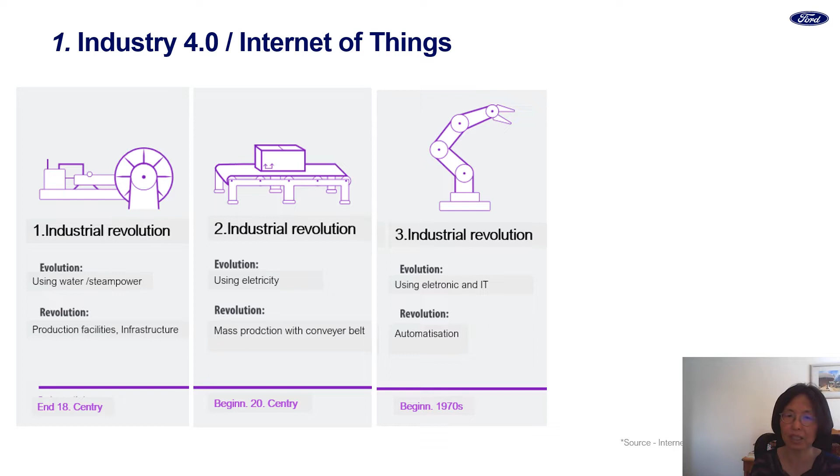Most of you are already aware what Industry 4.0 is, but to get the same basis, I would like to go through it quickly. The first industrial revolution is production facility and infrastructure revolution using water and steam power. The second industrial revolution is mass production with conveyor belt using electricity; Henry Ford was the main contributor of this revolution. The third industrial revolution is automatization using electronic and IT systems. The fourth industrial revolution is the cyber physical system using complete digitalization and net connection. Here, cyber means internet and physical system is things, so we're talking also about the Internet of Things.

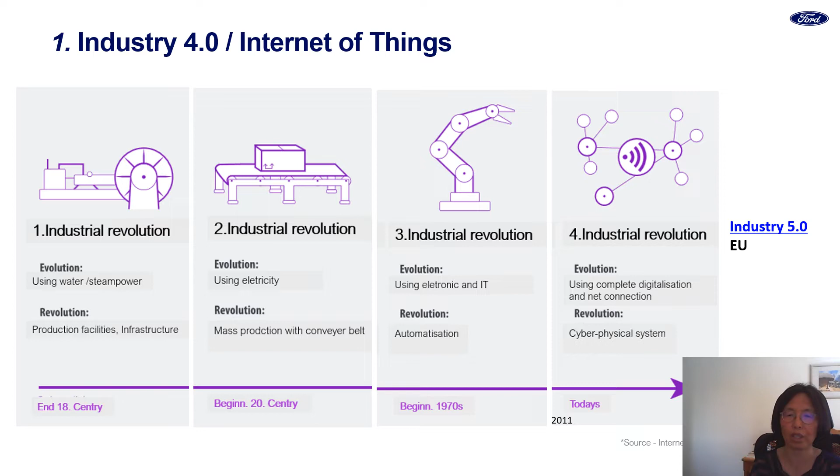Now the European Union is speaking about Industry 5.0. Until now, industry has been focusing on economical growth and only shareholder values. But with time, people recognized something is missing. We are humans, and we recognize also that planetary resources are limited, along with all these climate changes. That is the background of why the European Union defined Industry 5.0.

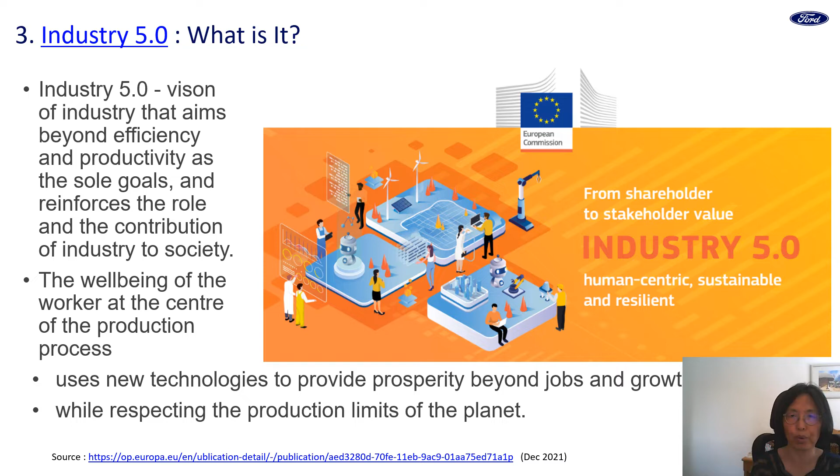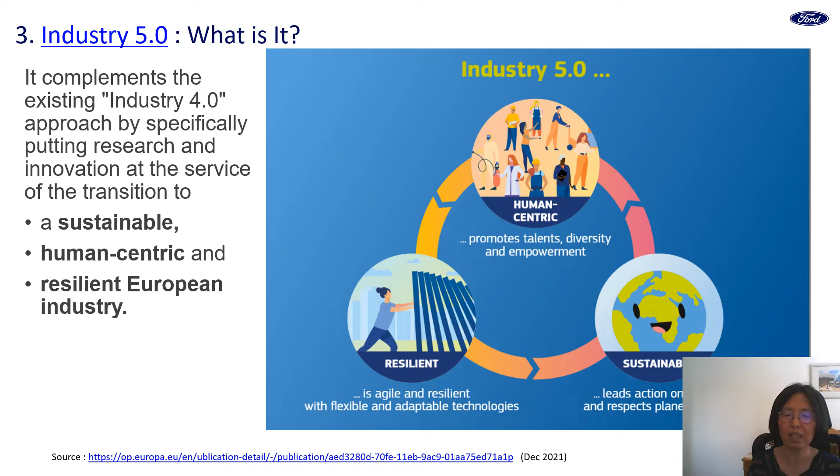What is Industry 5.0? It is not a real industrial revolution, but it complements the existing Industry 4.0. We are focusing on three main areas: sustainable, which leads actions on sustainability and respecting planetary boundaries; human-centric, which promotes talents, diversity and empowerment; and resilience, which is agile and resilient with flexible and adaptable technologies.

At the moment, the automotive industry is in transformation phases to CASE. C stands for connected, A stands for autonomous, S stands for shared, and E stands for electric. In order to get a sustainable business, we need to have a robust product lifecycle management using Industry 4.0 technologies.

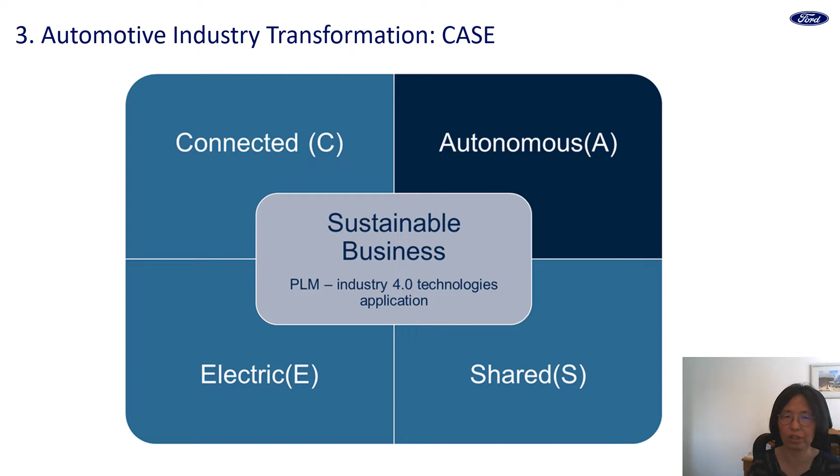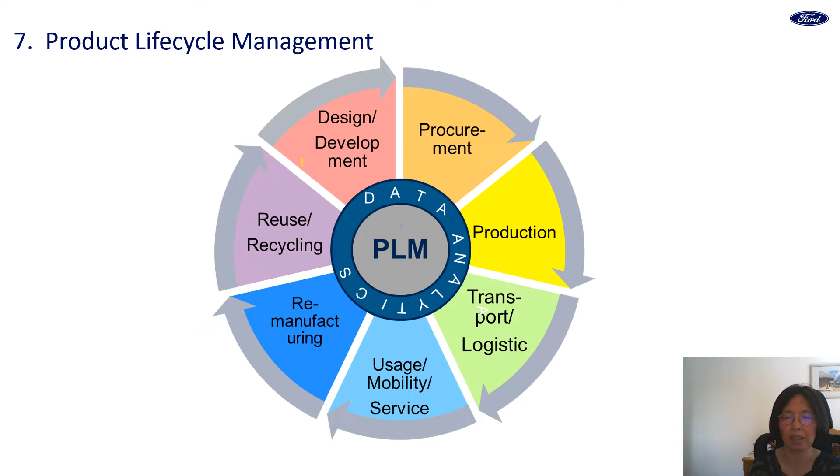Let's speak about product lifecycle management. We start with design and development phases, then go through procurement and production. After the vehicle is produced, it is transported to the customer and the customer uses it. At the end of the life cycle, the vehicle parts are remanufactured or recycled. If we look at this product life cycle, we have a lot of data. When we connect that data and analyze it, we can have a much more robust product life cycle management.

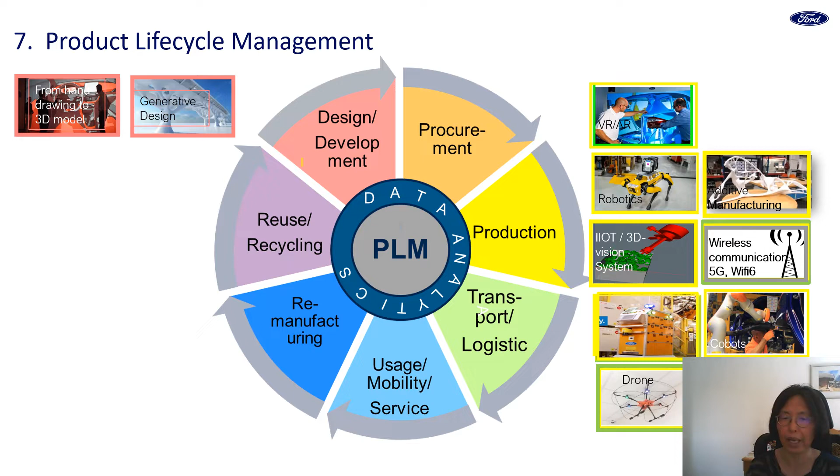We have different technologies used in different phases, and I will show you some of them in product development, procurement, production, and transport phases, as well as blockchain, AI, and wireless communication, which are used across the whole product life cycle.

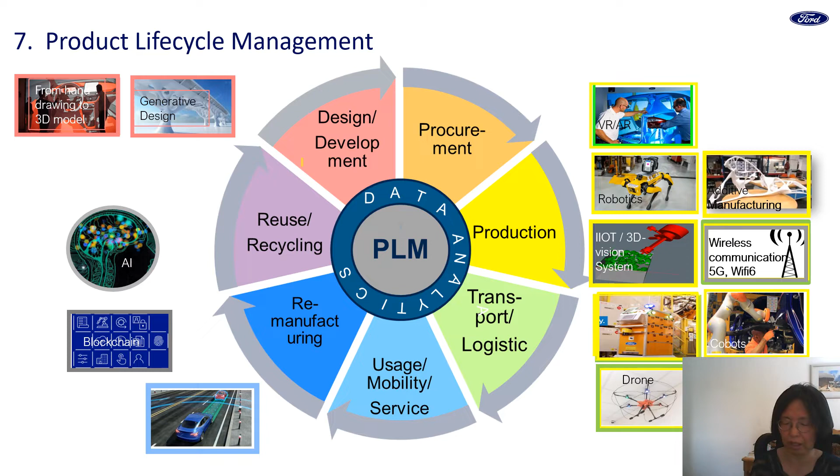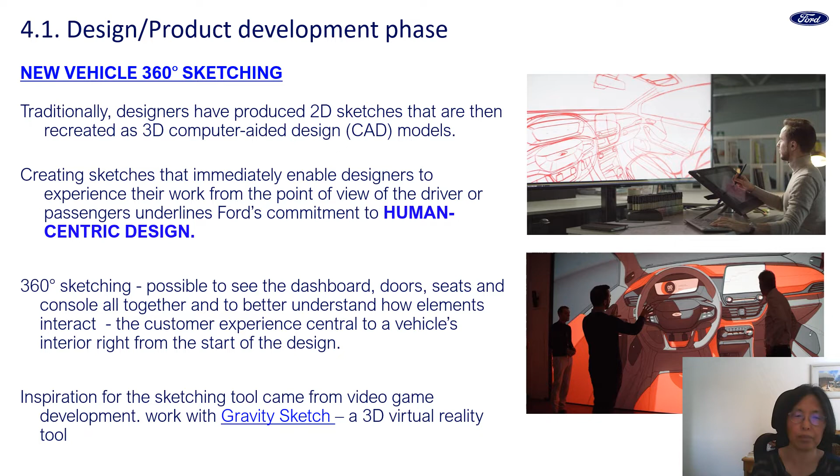Next technology is generative design. Generative design is autonomous geometric design based on specification and constraints. There are three categories: first, topology optimization; second, biomimicry; third, morphogenesis. Topology optimization optimizes by removing unloaded material from an existing design.

An example: here you have the existing design, and these parts are not loaded, so you can take out the materials iteratively, so you get a part which has much less material, meaning less weight.

Biomimicry is optimization based on nature's behavior, so you can see here tree or leaf structures or bone structure. The third method is morphogenesis, which optimizes design based on an algorithm of how a group of cells respond to their environment, so cells that are actively loaded grow stronger. It is the opposite method to subtractive topology optimization; it is an additive method, and you can use different software for it.

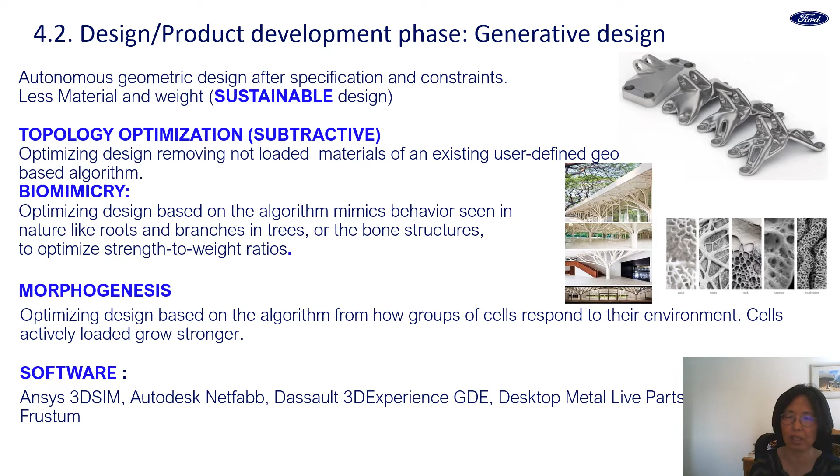This gives us a sustainable aspect, but most of these designs are very difficult to produce with a conventional production system. With additive manufacturing, we can produce those parts.

An example here: we have the conventional part, but we designed it with topology optimization using polymer material, and it is much lighter, and we don't need too long a lead time. So polymer additive manufacturing is state of application.

We are doing some metal additive manufacturing in progress, and there is also 4D printing in research. 4D printing is if you put some 3D printed material in a special environment, for example in fluid, it can fold together, so it assembles automatically.

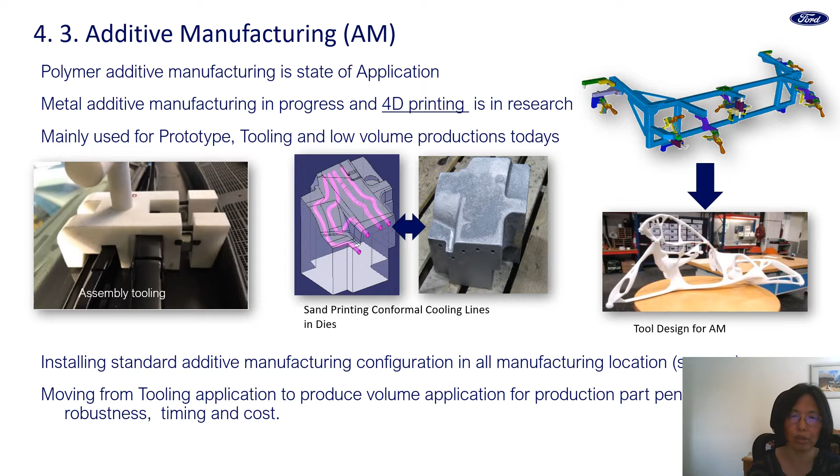At the moment, we are using additive manufacturing mainly for prototypes, tooling, or low volume production, but we are working on getting to mass production. It depends very much on production robustness, and at the moment pre-processing and post-processing are very manual processes, so some work still needs to be done to achieve mass production.

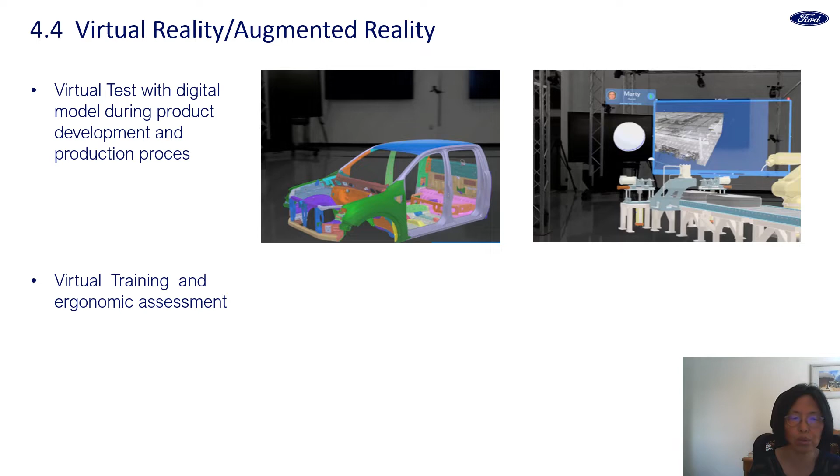As mentioned, the first examples use virtual reality and augmented reality in product development and in the product itself, but we're also using this technology for the production process, virtual training, and ergonomic assessment. With the digital model, we can do the ergonomic assessment in very early phases, achieving a human-centered production process, and because we don't change things later, we have resilience.

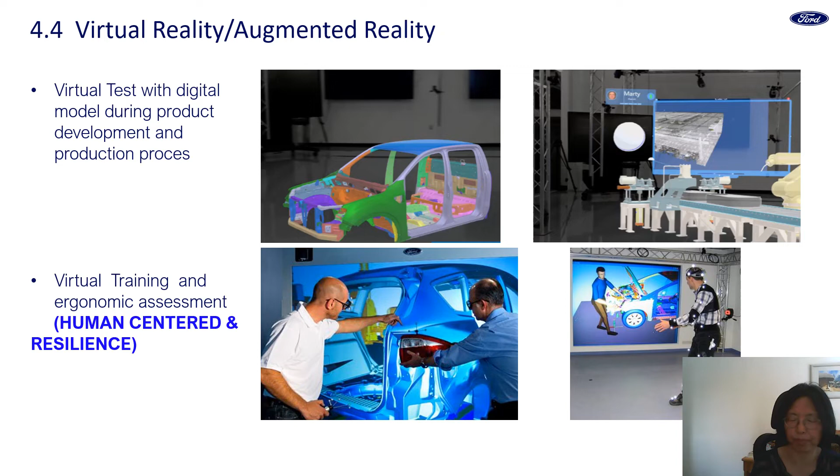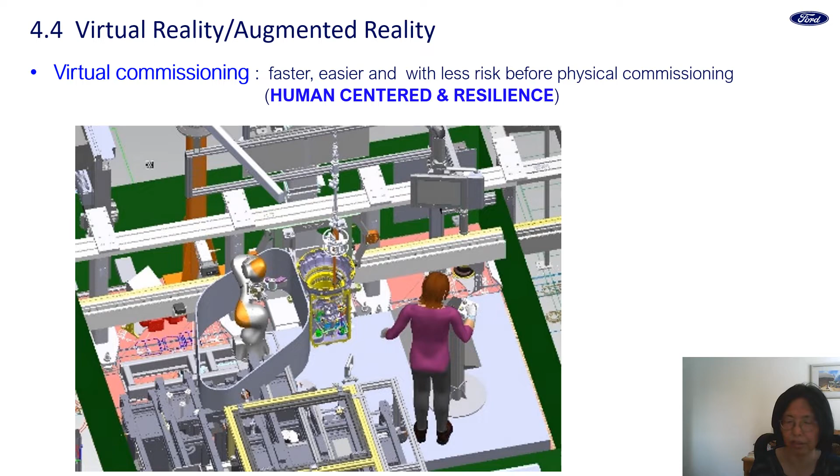The next tool is virtual commissioning. With virtual commissioning, we can put our equipment in a 3D layout with a dynamic model into the production location, so we can assess early before going into physical commissioning. This makes our physical commissioning much faster and easier with low risk, giving us human-centered and resilience aspects.

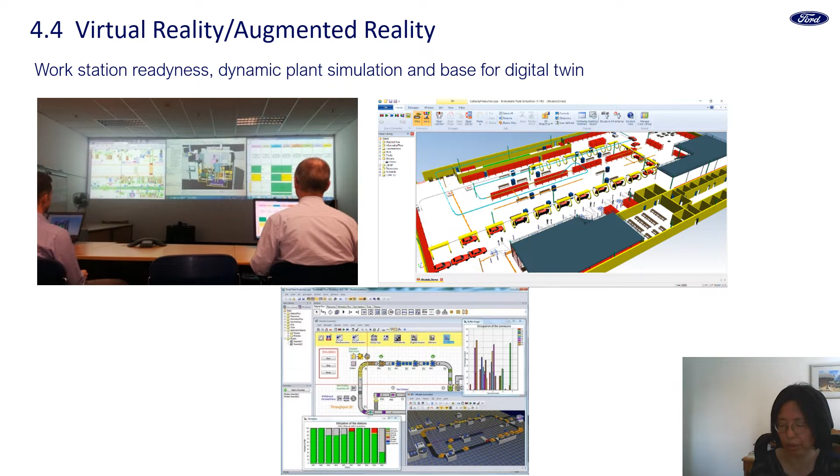We also use virtual reality and augmented reality in workstation readiness, dynamic plant simulation, and each station workload assessment. That is all the basis for the digital twin.

The digital twin requires a complete, granular, and actual virtual representation first. In the product life cycle, we have different digital twins: product digital twin, production digital twin, and vehicle driving digital twin. Afterwards, you can also have a recycling digital twin and so on. To go through that, you need product digital twins first.

This involves virtual product simulation and product testing, which requires verification of all the virtual product and testing, and virtual production including production simulation and 3D layout. Then you have verification of virtual product and virtual production, which includes virtual commissioning and virtual workstation process checks.

If you have all those virtual models and you put your production line together, you also need real-time data, with all those production lines connected. That needs to be verified with the virtual model and real-time production. If you have both the virtual model and a verified virtual model with real-time data, at that point we can talk about a true digital twin.

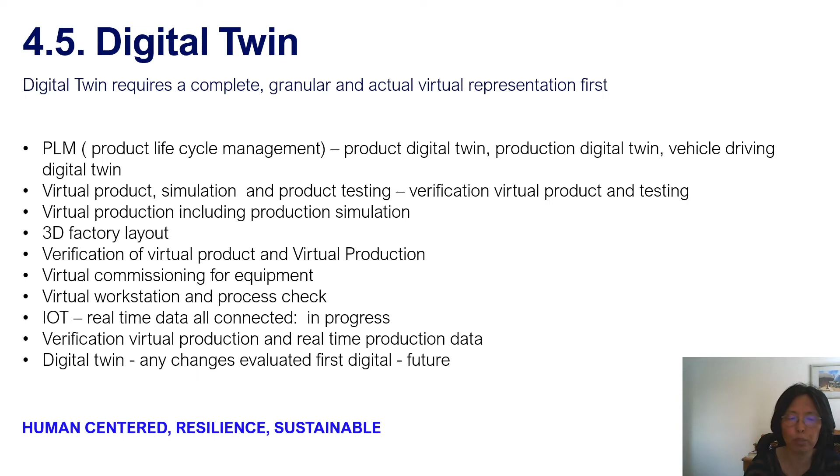We still have some work to do, but I think if you have this digital twin, it gives us a big advantage. We can evaluate any changes digitally first before making physical changes, giving us human-centered, resilient, and sustainable aspects all together.

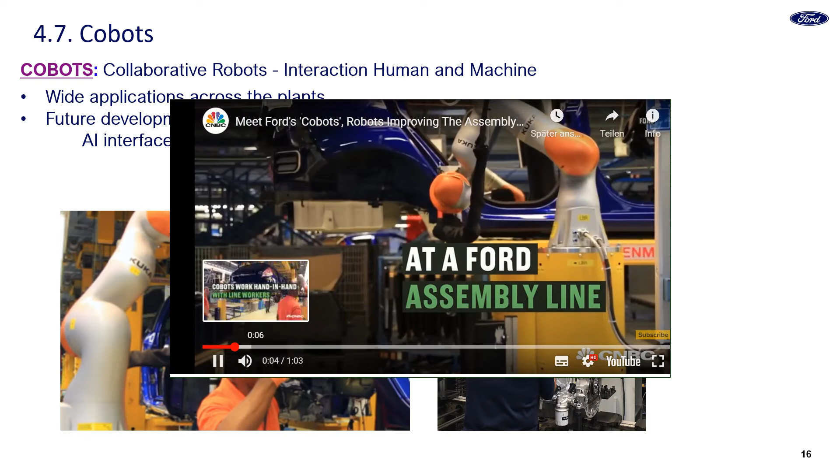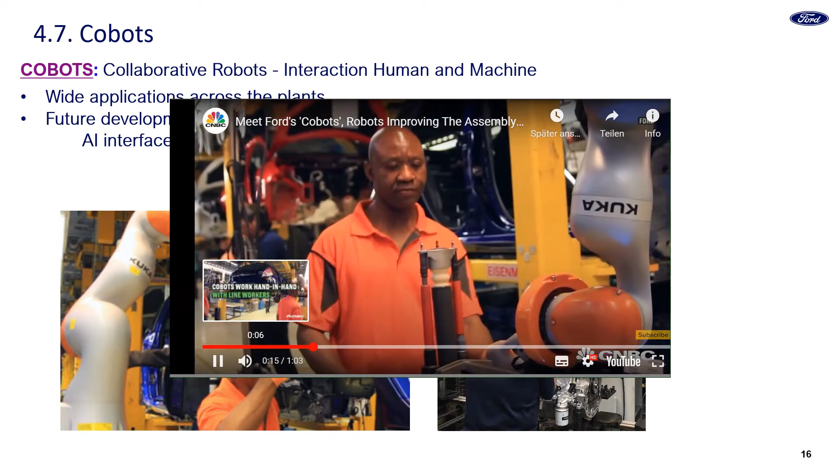The next technology is the collaborative robot. This is an example from a Cologne assembly plant, where the operator works together with the cobot to install a shock absorber into the car.

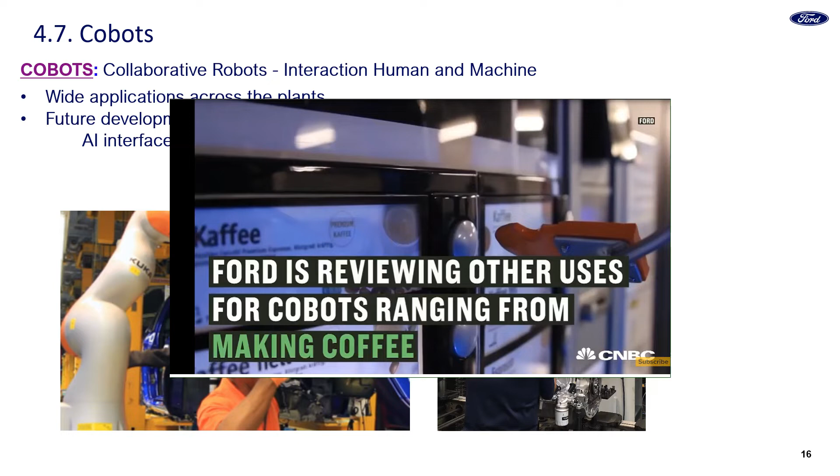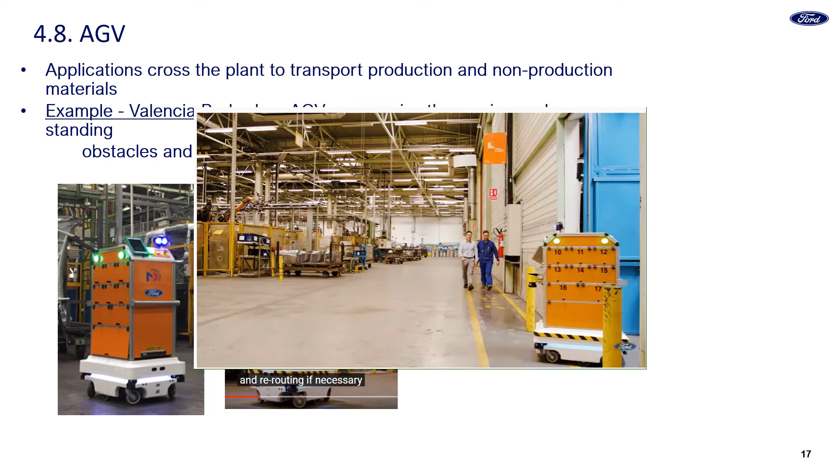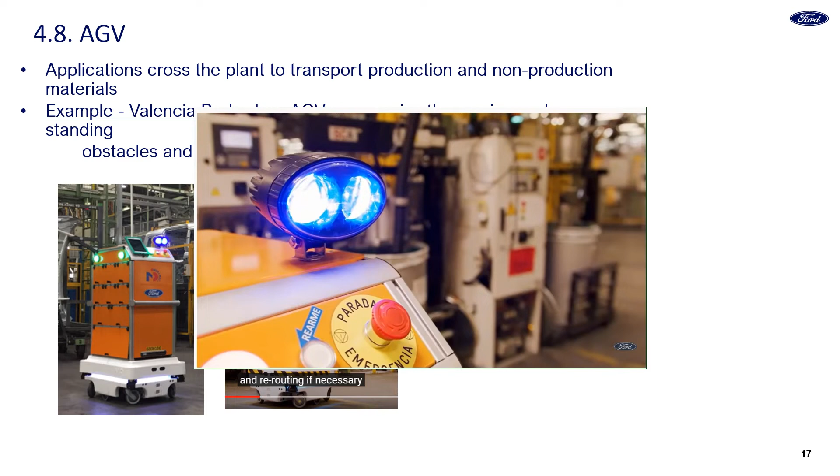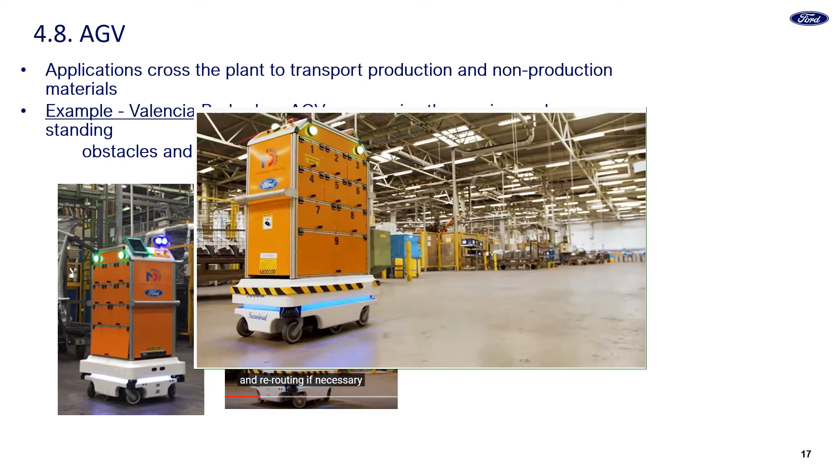The next example is the auto-guided vehicle in the Valencia body shop. Its main duty is to deliver spare parts to all stations in the line, in this case body and stamping. This autonomous vehicle doesn't need any external guide to navigate. We call it 'Survival' because the intention was to avoid hazards.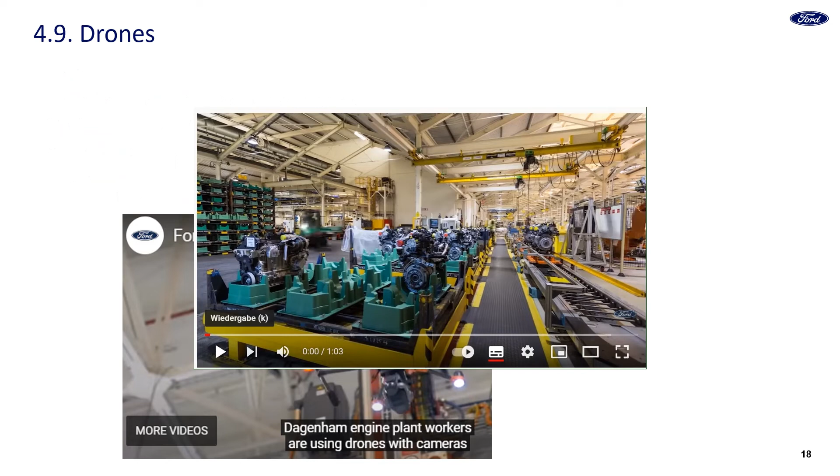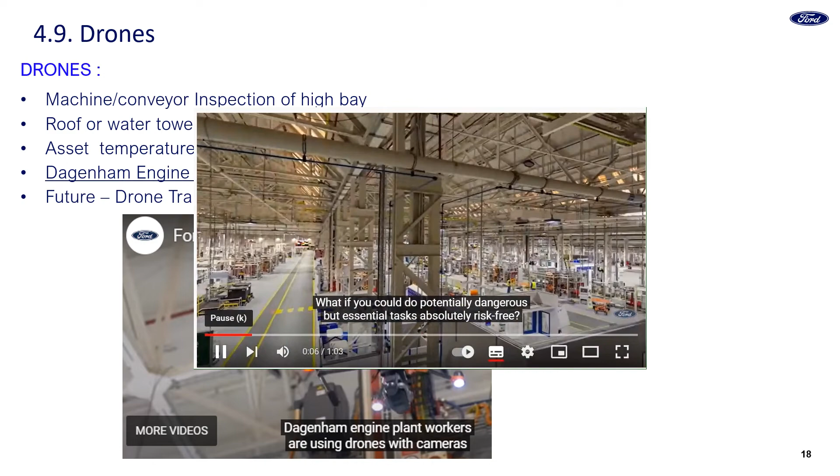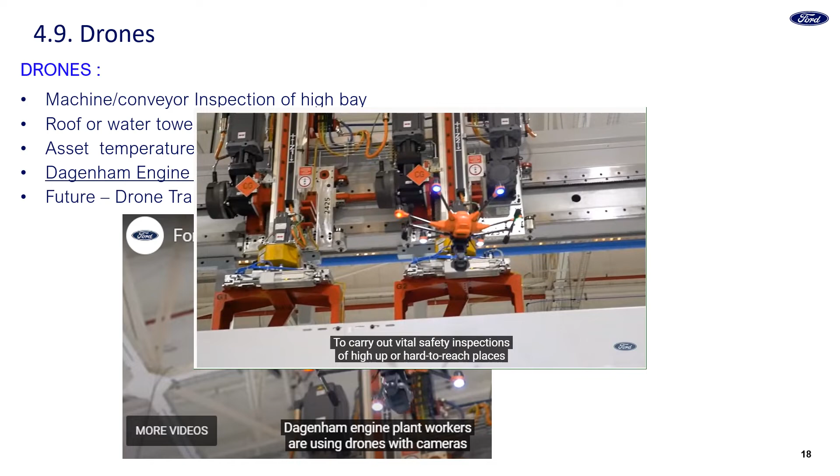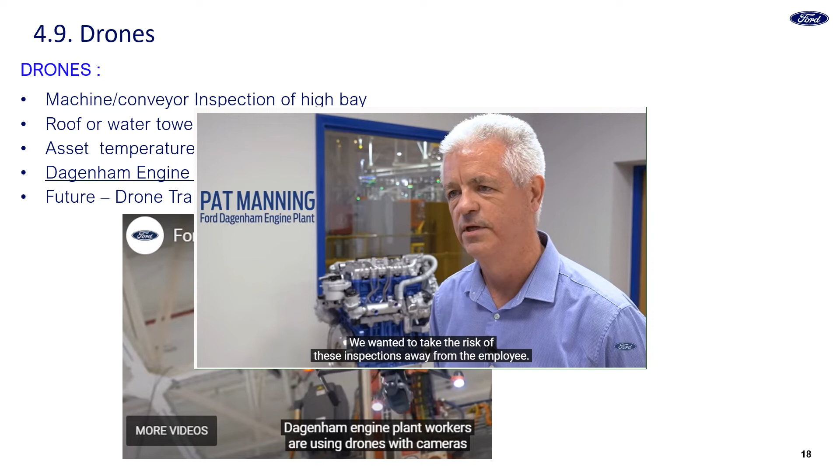The next example is at the Dagenham engine plant, where we are using drones for potentially dangerous but essential tasks, making them absolutely risk-free. A group of Ford workers are flying drones around their factory to carry out vital safety inspections of high-up or hard-to-reach places, using cameras to safely and efficiently inspect machinery and roof areas. We wanted to take the risk of these inspections away from the employee, and by using a drone, we can do that.

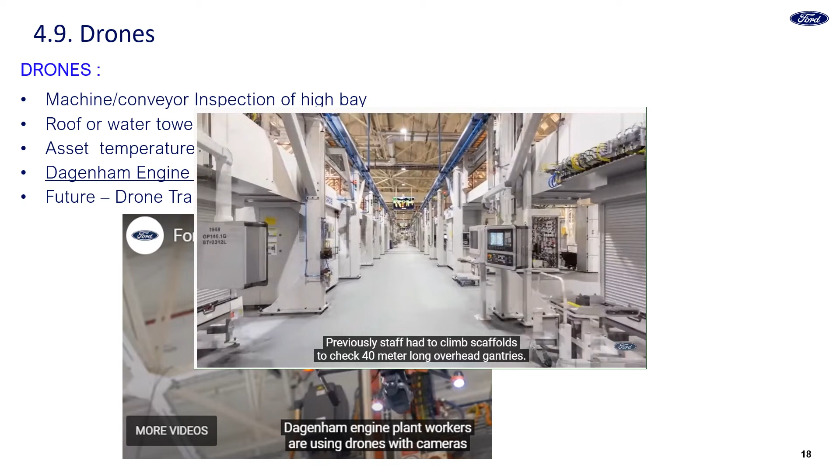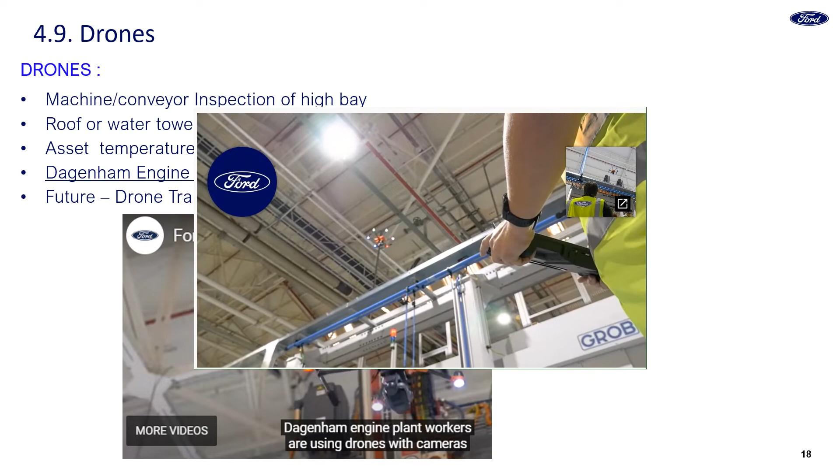Previously, staff had to climb scaffolds to check 40-meter-long overhead gantries. Now, maintenance staff can zoom in on each area with feet firmly on the ground. The whole production facility can be covered in a day by controlling drones equipped with GoPro cameras to thoroughly inspect each area, ensuring they're well maintained and comply with rigorous safety standards.

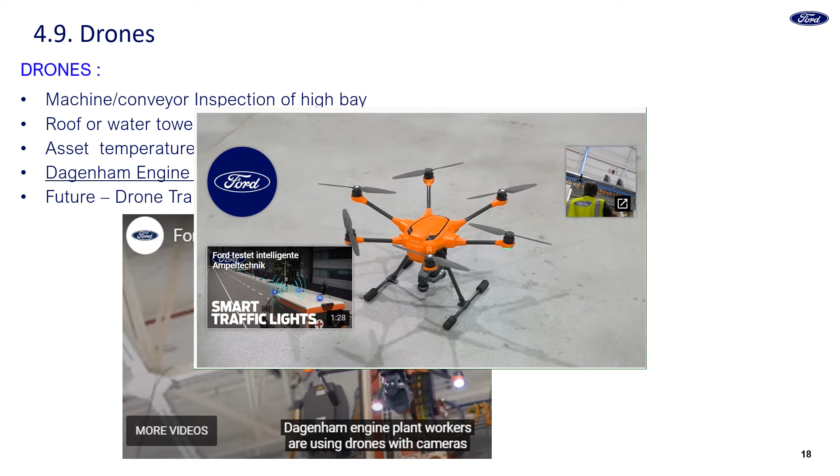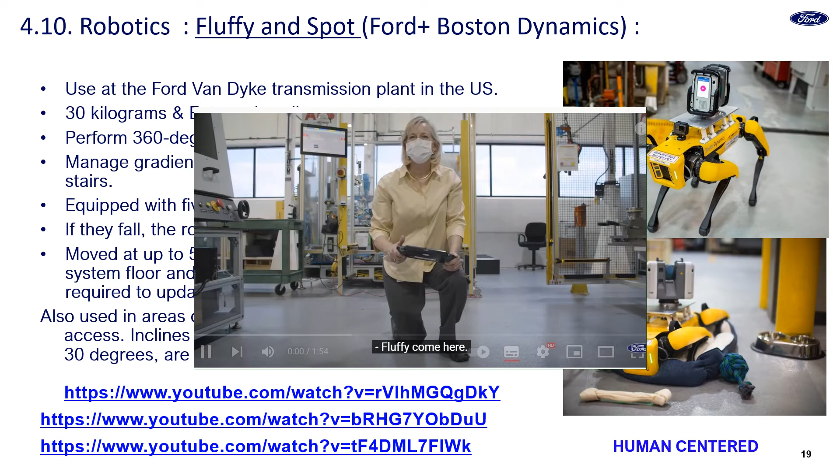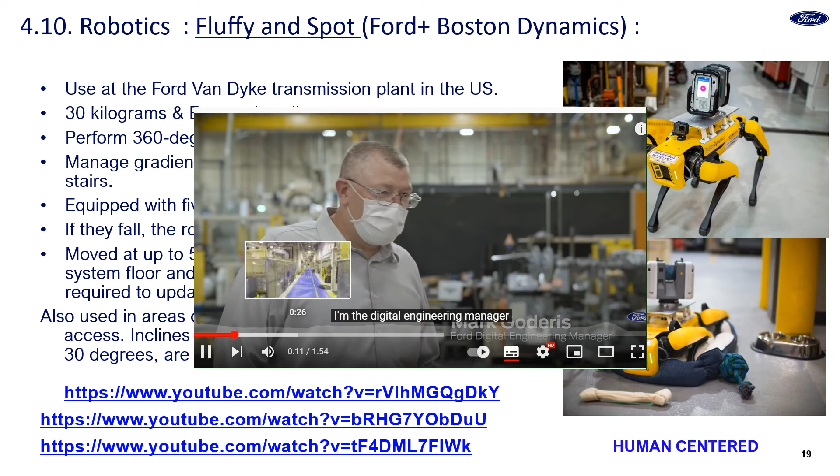Next example is Fluffy. Fluffy, come here, good dog. I'm Mark Goderis in the Advanced Manufacturing Center here at Ford Motor Company. I'm the Digital Engineering Manager, and I'd like to introduce Fluffy, our quadruped robotic dog.

This is a Boston Dynamics Spot. We've nicknamed him Fluffy, and we're utilizing it to do laser scans of our facility. That image is then used by our engineers to develop new vehicle programs, allowing them to create a more accurate layout of our facilities.

These cutting-edge technologies allow Ford Motor Company engineers to save money, retool facilities faster, and bring new vehicles to market sooner. Hi, my name is Paula Wiebelhaus, I'm Fluffy's handler. Considering I'd never had a game controller in my hand before I received Fluffy, at first it was kind of intimidating to be in control of a dog this high-tech, but he is easy to operate and maneuvers well through spaces.

He'll go into some tight areas that Scout, our other robot, won't be able to accommodate. I have never owned a dog before in my whole entire life, so this is our first entry into dog ownership. Like people bond with their cars or with certain tools in their workshop, I certainly have bonded with my companion dog, Fluffy. Fluffy definitely has a coolness factor.

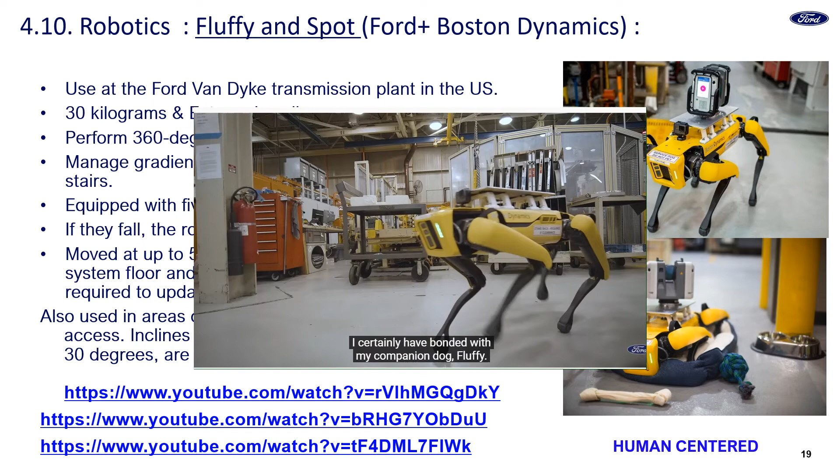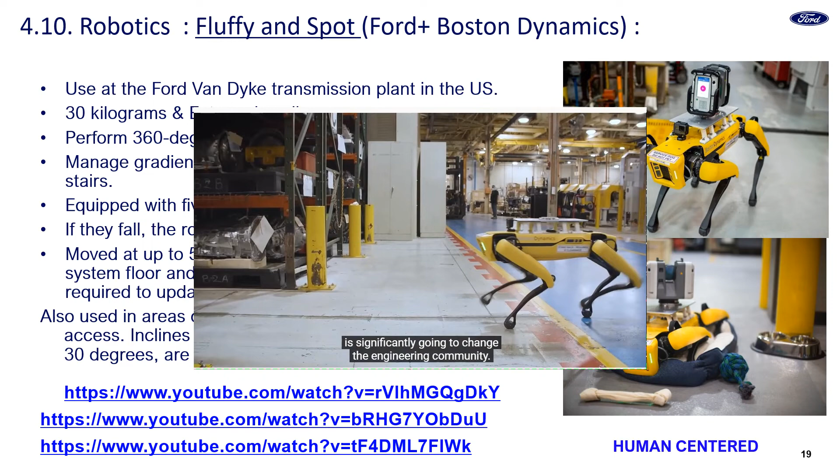So it's been amazing to be able to take something like Fluffy and turn it into a usable engineering tool for our company. The opportunity here and what this robot dog can do is significantly going to change the engineering community. It also gets people excited about the fact that we're on cutting-edge technology here at Ford Motor Company.

Next technology is blockchain. It is used in Bitcoin at the beginning. All participants in the value chain approve their ledgers. It's like a digital fingerprint, and it's clear and safe documentation.

But there still needs a lot of computer capacity. At the moment, we are working with IBM on how we can do it with the combination of AI and blockchain technology.

It is ideal for supplier chain management, from raw material to the end of cycle, to do product life cycle tracking. It is reflecting resilience and sustainability.

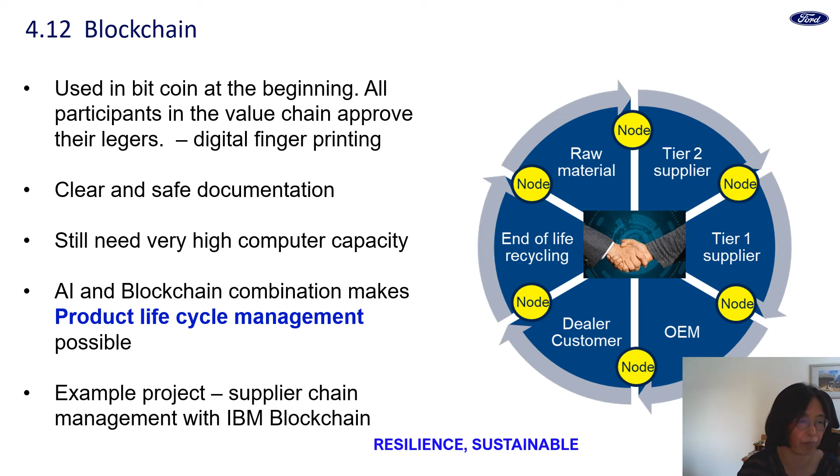Next example is 5G application. We've got a long UK history of manufacturing Ford vehicles with internal combustion engine technology, but we're in a process of total transformation.

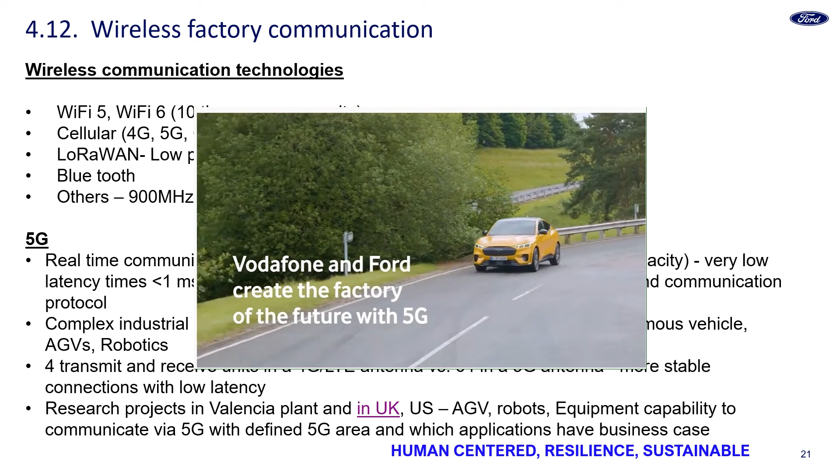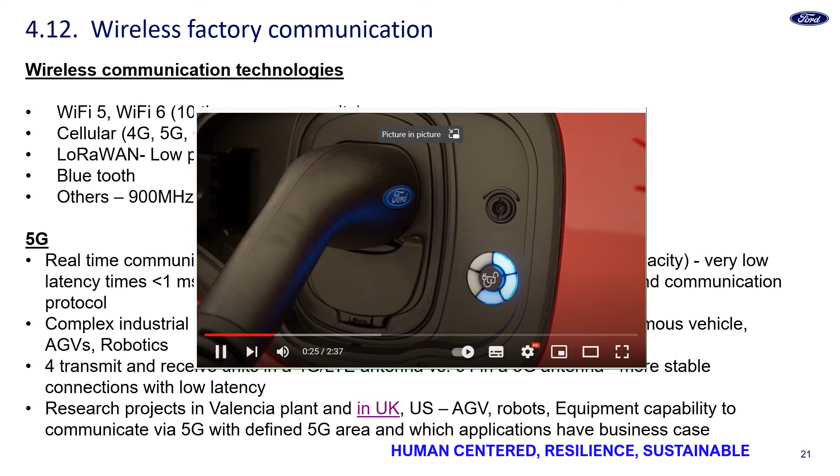For us in Ford Motor Company in Europe, we are ready to deliver that significant pace of change in terms of the adoption of plug-in and fully electric vehicles. We have to very rapidly redeploy all the assets that we've got into factories that can make low carbon vehicles by 2030. The factory of the future is all about moving data, and 5G is an enabler for that.

Ford has a long-standing partnership with Vodafone. Building a pilot line with 5G was a great opportunity for us to then look at the technology, understand the technology, and without this learning, we wouldn't be able to consider doing this in one of our plants.

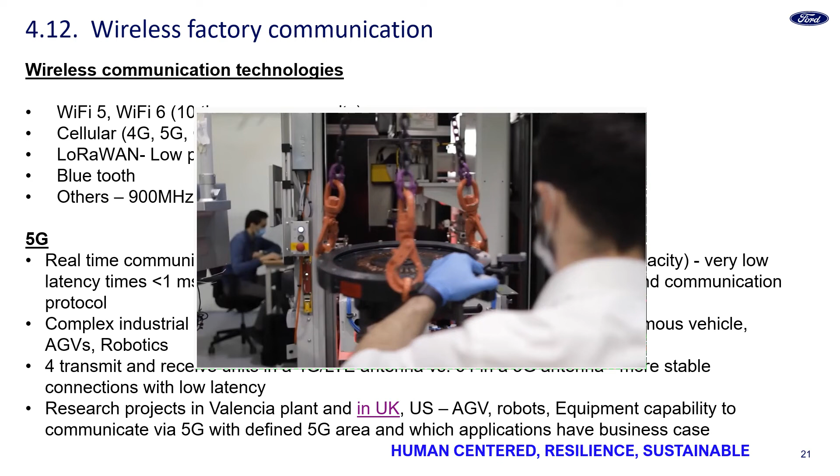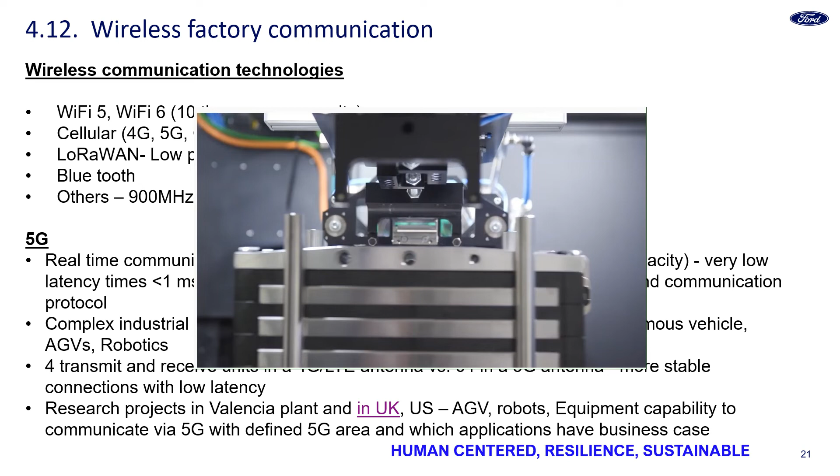One of the use cases here in Dunton, using the Vodafone mobile private network, is on our welding machines. So we're capturing images before we're welding and then after we're welding, and then we can use AI and feed back to the machines if the weld isn't particularly good, and then change and re-weld whilst the part is still in the machine. You could be welding and creating terabytes of data very, very quickly.

So it's important that we have the connectivity that can keep up with that and that can send that data and store it as quick as we're producing it.

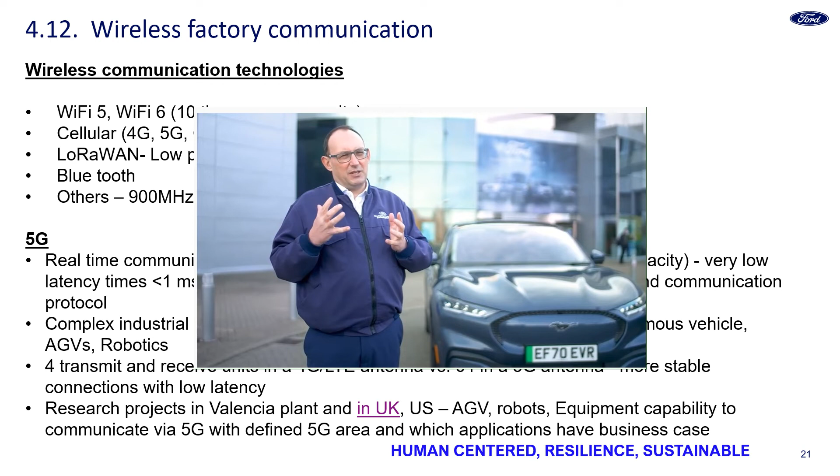We've been able to see data back from the laser process that tells us that we're getting a build-up of heat in our lenses, which means that we need to replace them. We could then contact an expert to discuss it, but we can also use the 5G network in conjunction with a HoloLens system to guide an operator through the process of changing that lens.

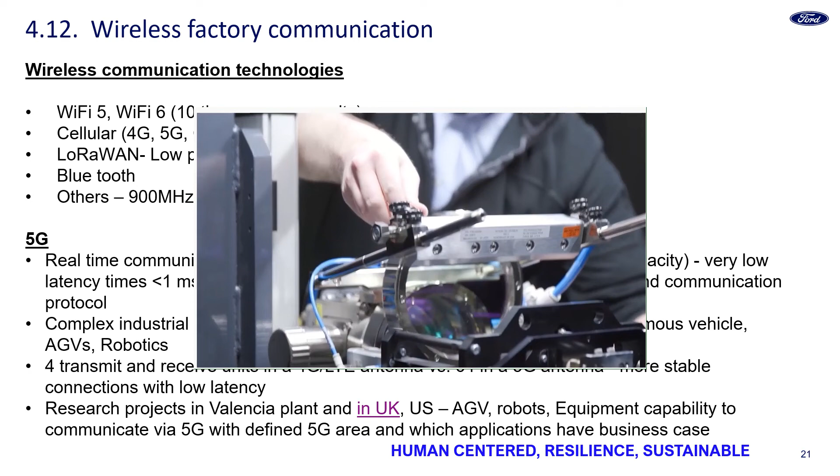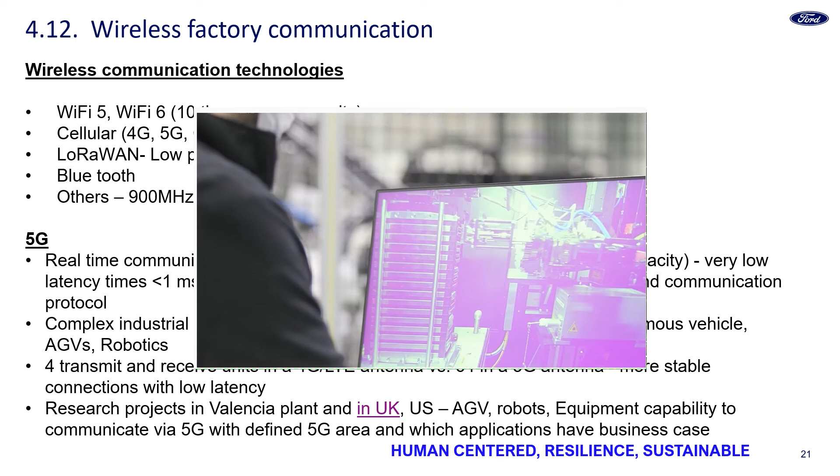We're keen to make sure that we can connect securely, and of course with 5G you have the ability to use SIMs on every single device and make sure that you're aware of every device that's communicating on your private network. We've got plans to totally transform our vehicle lineup over the next 10 to 15 years.

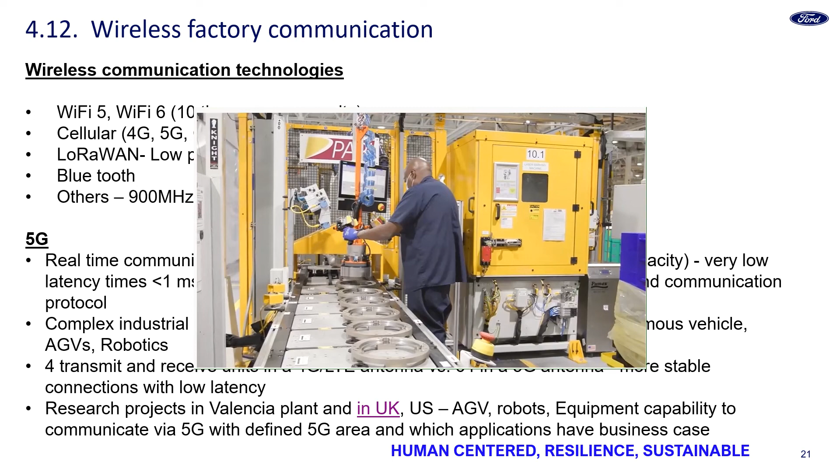The manufacturing engineering team are at the centre of the change of EV powertrain in Europe, and this team needs to work with people like Vodafone so we can do that as efficiently as possible.

Summarize the factory of the future, how it looks like after we applied all those technologies. It looks like integrated planning and execution with real-time track and trace.

When the customer ordered the vehicle, that is connected to production plan, supplier chain management, logistics and production plant, and also distribution, and also when the customer will receive the vehicle.

And in the logistics, it will be self-monitoring and self-adaptive logistics. And also intra-logistics, we will have smart shelves and also autonomous remote driving within the plant and the logistics when the vehicle is completed. And facilitating inventory monitoring and also automatized reordering will be part of them. Of course, the wireless communication will be also part of them.

In the production, AI optimized, built, flexible and integrated production plan and execution. And also predictive maintenance and predictive quality is closer to zero failure and high efficiency through the real-time monitoring and controlling. And digital twin will be part of them with the Internet of Things in the real-time data and cloud connected and edge computing.